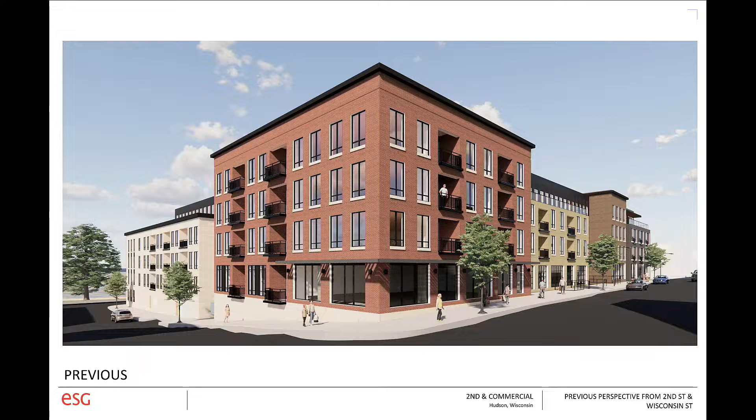The next series of images are before and after. This is the image we first presented to council and to the neighborhood. You can see this view from Second Street shows 4 stories.

The street level is a compressed commercial level. What we've done is remove a portion of that second story, so now the building is 3 stories, about half a story lower. This also gives more head height to the commercial spaces and lobby space, making them much more functional, and the proportions are much more in keeping with turn-of-the-century commercial buildings up and down Second Street.

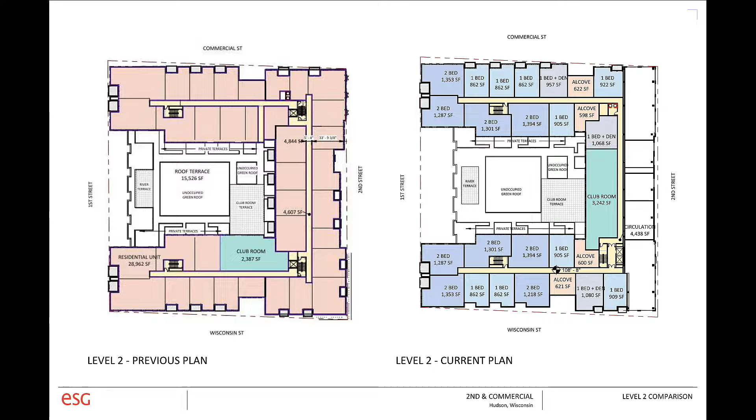The whole goal of the design is to create a cohesive development that accommodates parking without expressing it externally. You could walk all the way around this building and not know there's a parking garage in the middle of it.

These next few images are the current renderings we have. We're still working on these—they look pretty sophisticated and realistic, but they're really still just concept level and schematic.

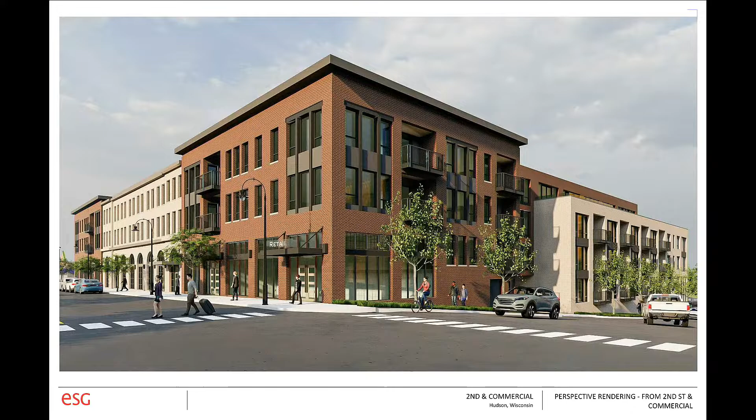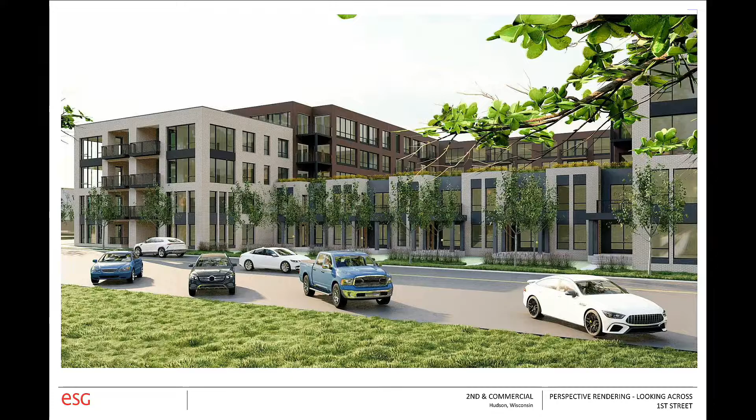These next views are montages where we took a few street view photographs, based on some feedback from the neighborhood, from staff, and also some concerned neighbors.

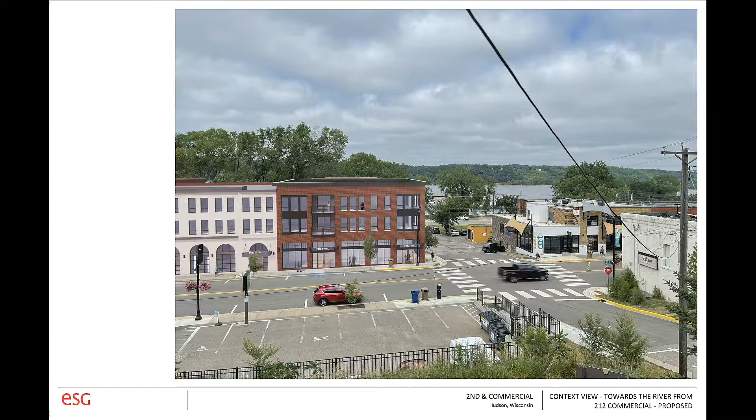Yeah, well, I'm not going to speak for them, but they were somewhat pleasantly surprised at how minimal this was. I did just speak for them, but I shouldn't. Sorry, hold on. But that other vacant lot down there will go someday too, you know that. Sure, that corridor will disappear down here. Yeah, I think it would. The goal is that this area becomes a built-up part of downtown, just like a block north, much like it was earlier in the century.

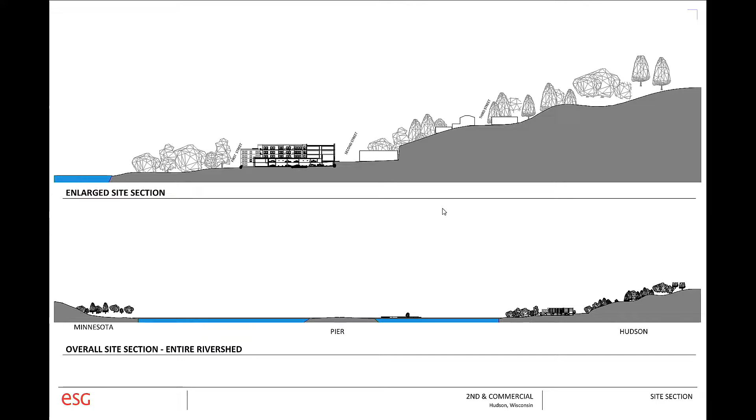This site is based on Hudson zoning code, which is based on DNR measurement of height. This site is within the St. Croix Scenic Riverway, so the DNR has interest here and regulates it with height maximums that the city then adopts. The height limit here is 45 feet, so what we've tried to do is design every elevation to be 45 feet maximum from the street level.

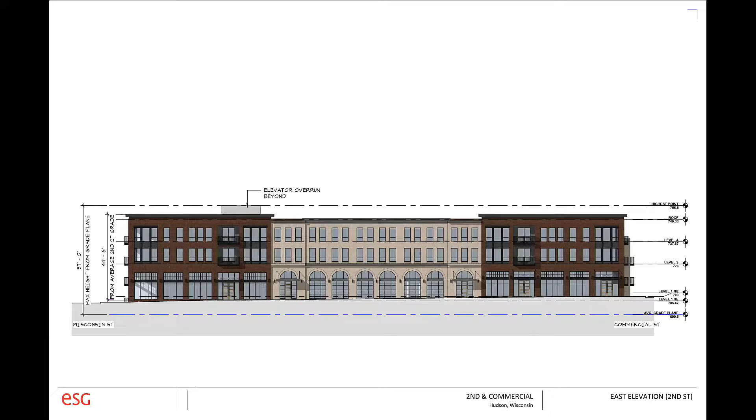This is 2nd Street right now, the elevation from 2nd Street, but as we go around the corner you can see where that grade drops off. The way height is measured is from an average grade plane, and this blue line here is the calculation of that average grade plane.

So it's lower than 2nd Street and higher than 1st Street. And what we're proposing to do is, instead of designing the entire building to be a consistent height within 45 feet of that grade plane, we're proposing to step down the building so that a portion of it is higher than that 45-foot maximum, and a portion is actually a little lower than that 45-foot maximum.

We think it fits into the site a little better for the building to follow that natural topography. And then the variance we're requesting, the way that height is measured is to the absolute top of the uppermost point of the building. In this case, it's the elevator overrun, so it's a very small portion of the building that needs a little extra height for the elevator.

So when you see this max height from grade plane, that 57 feet is from this average grade plane to that highest point of the elevator overrun. The highest point of that building, which is really what you perceive, is about 5 feet less than that. And here you can see where we measure the building from the average grade of 2nd Street to the highest parapet. We're trying to stay under 45 feet.

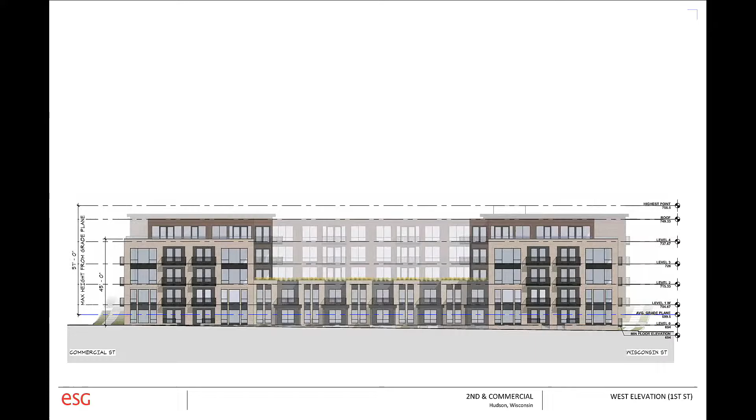And then similar on this elevation on 1st Street, 45-foot height from the street. And here's that view from First Street, looking back up the hill. And here's the Wisconsin Street elevation, very similar to the commercial street elevation. This is where we have the most grade change, where we see almost that full 18 feet of grade change.

Is that elevator only going to be accessible to those units in that part? Because you've got 109 units, obviously not the first floor, but one elevator for all of those units? A pair of elevators, yeah. Well, in the same spot, though? Correct, yep, a pair of elevators next to each other, correct.

So if you live on the far north side or far south side, you're still walking? Correct, yeah, sometimes with buildings that have a large floor plate, you'll distribute elevators in different corners of the building to shorten the walking distance. But when you group the elevators, they actually have a shorter travel time, because when you hit the button, you take the first one that arrives. If they're separated and remote, you're waiting only for one elevator. So the reason we group them is, yes, it takes longer to walk from your unit to the elevator, but your actual travel time from your unit to the lobby is shorter.

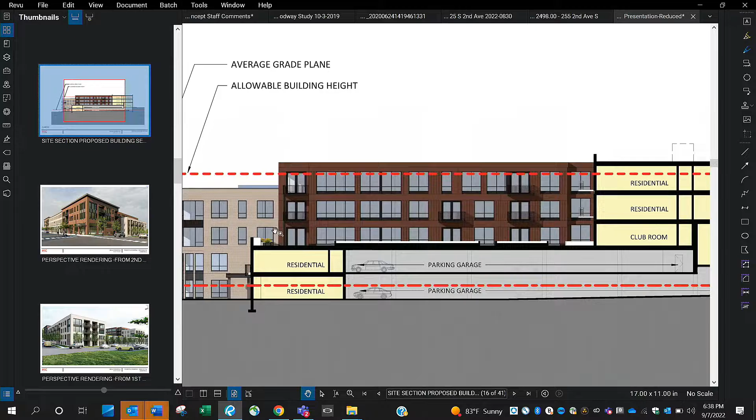Bear with me here. Whoops, went too far. So here, for example, I'll zoom in a little bit. Pretty much every building along First Street has to deal with this, and they have to raise their building up to be 2 feet above that elevation. So the 100-year flood elevation is roughly right here at First Street. There's a portion of First Street that's a little bit lower than that 100-year flood elevation. So what we do is we raise the building up a minimum 2 feet above that.

Is there any data available on how many times we've exceeded that in the past X number of years? 1965, I recall, that was the last time. Really? That's where all those standards came from, was that bad flood of '65. Yeah, the FEMA standards require, in order to avoid buying flood insurance, you to build 1 foot above the 100-year flood line. Wisconsin requires you to build 2 feet above, so they have a little extra foot for some reason.

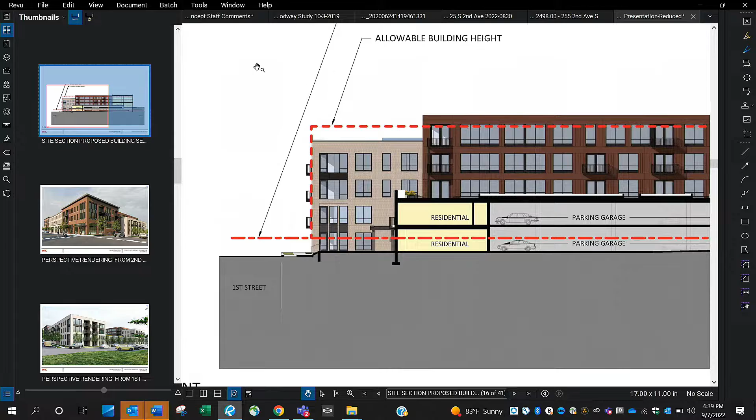Can I ask you a question about your building height and what you're talking about as the average grade elevation? Sure. Back to that last slide you had up before you flipped all the way back here. Sure thing, please. Yeah, okay, and then the one showing the slope of the...

Yep, there we go, I think that one. This is a good one, yep. Yeah, that one.

By looking at your average grade plane, it looks like the high point of your building, which is the center part of it after the front block, appears okay. But at this average grade, it would appear to me that this part of the building should stop right about here—about 1, 2, 3, 4, 5, 6, 7 windows in.

If I'm just looking at your own drawing here, that would be my conclusion. Well, to be perfectly honest, this whole portion of the building exceeds the maximum height. Yeah, since we're asking questions, I'm on it with you. And I know I wasn't here when this concept was starting.

Well, it was the city council, not us. Right. I'm just kind of disturbed by the fact that that's going to be that high.

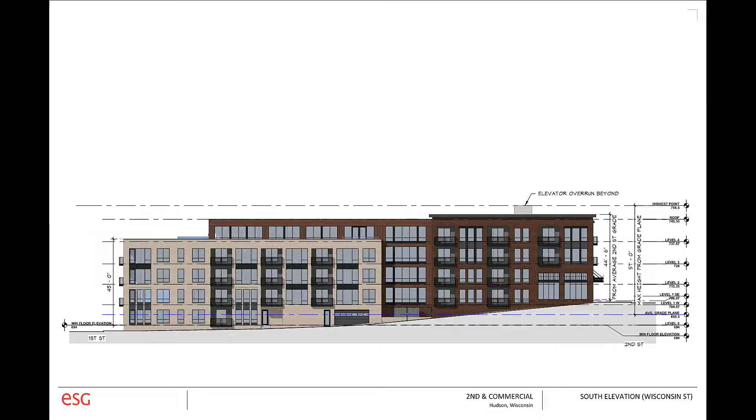I feel like this has been happening downtown—residents, people have been purchasing buildings, and then bigger buildings go in front of them. It's frustrating to see people spending money on properties and then bigger buildings going up in front of them. I think it hurts property values, especially for the houses on the hill if their views are blocked.

I didn't think that was minimal at all. I thought that was pretty excessive, especially when we know another building will be going there eventually next to it.

I also have a problem, and I had the same problem with the other building that's going up. I don't understand how with 109 units there's only 137 parking spots. I understand we have an equation, I get it, but I didn't get to that yet.

Here's the thing—I'm still floored by the idea that we think we're only going to have one car per unit. No, it's not going to happen. So where do all those overflow cars go?

I don't know, because as we've been saying for the last 20 years since I've been here, we have a parking problem, which I don't agree with completely. I've always said we have a walking problem, but with all these buildings coming in, we're going to have a major parking problem no matter how many parking lots we put in.

There's no way—I will eat my left shoe if we only have one car per unit for all of these buildings going up. And it's not just yours. Maybe residential parking standards have to apply here and not downtown, because this is a residential unit, not a commercial part of the building.

So it has to be classified like the ones, like the Massey up on the hill across from the dog track, where they have underground parking too, but also 80 surface parking spots for overflow—friends, guests, relatives, and all that. And I have the same concern.

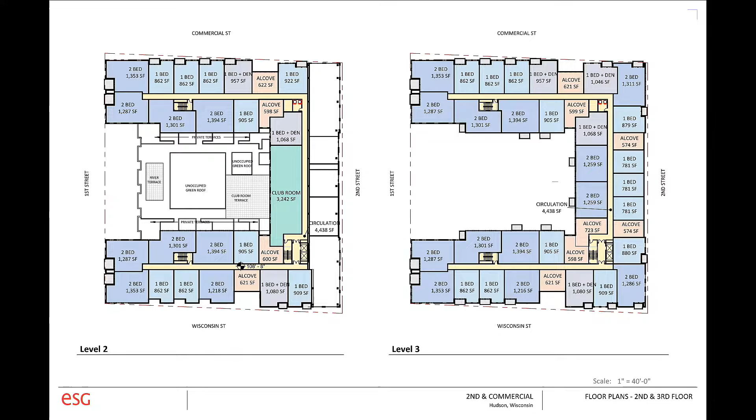All of that area, the lighter shaded part in the center of the building, is all accessible outdoor space for the building. The programmed part runs around the perimeter, and we haven't really scratched the surface on exactly how this area is going to be laid out and where all the features will be, but the intent is that this is the outdoor green space—it's just elevated off the street level.

Thank you for the clarification, but I still think you're short. I'd like to see the study you mentioned. Also, when you talk about this being an urban area, I think what I'm reading into this is that you're anticipating occupants, a fair amount of them, possibly walking to work, since you mentioned we don't have a public transit system here. In addition, we also don't have a vast amount of employment downtown, and I'm curious how many people who work downtown would also be interested in living in a rental situation.

And with that, I'm also curious what the market rents are for all the units, and how that's segmented out. We're just over $2 per square foot.

And the way to make that equate to real money is just take the square footage of a unit and multiply it by 2. That's the average across the building. So a one-bedroom unit is going to be around $1,700? Some of them are more, some are less—$1,700 is typical for a one-bedroom market unit.

There are smaller units in the $1,300 to $1,500 a month range. Our largest townhomes on First Street will be significantly more expensive than that. So we create a diversity of price points throughout the building so that we can have a diversity of people at all different stages of their lives—bigger units, smaller units—and that is what influences our parking.

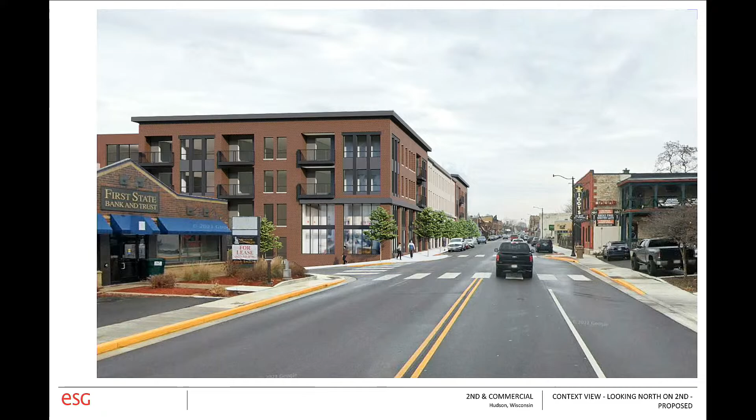I don't see the link to the existing architecture of downtown. I see it as a fairly contemporary building. I personally would like to see it blend in more. I think it sticks out significantly compared to the rest of downtown, where other buildings have attempted to blend in. I'm not against contemporary, I have no problem with that. I just think the other buildings downtown have tried to retain the character of the period they were built.

It's an interesting comment, Commissioner, because we heard that from the first concept we shared. And we spent a lot of time trying to improve the architecture to satisfy that point, to make it feel more consistent with the historical architecture of downtown Hudson. So one of the things we're really excited about is this central element, a 3-story building with arches that go along the middle of the building. There's a series of boutiques on 2nd Street that, if you just took the middle portion of the building, the white portion, it's pretty much exactly the same building.

I don't know what that building's name is, there's 6 or 7 tenants in it. But I'd encourage you, if you go to 2nd Street and look at that, then look at this, you'd say that actually looks strikingly similar to that building where Kensington is. The 3-story, all masonry with a window pattern that we think is pretty representative of downtown, with this nice thick metal cornice on top, were all influences we drew from spending time here trying to build a building that fit in.

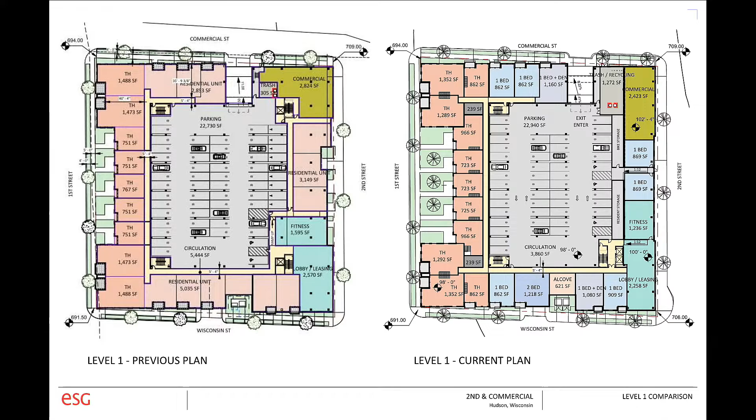You can see the retail on the left side, the 2,824 square feet on the corner, and then the 2,423 square feet on the corner on the right side. So the rendering on page 1 that says retail all the way down is wrong on those pictures? You gotta look at the inside diagrams. Yeah, maybe it's aspirational.

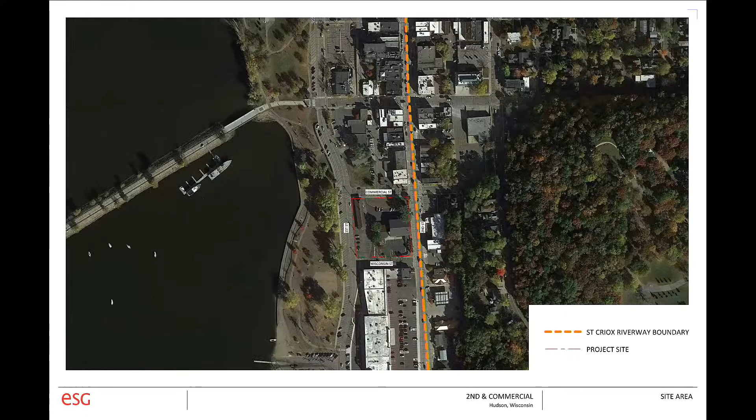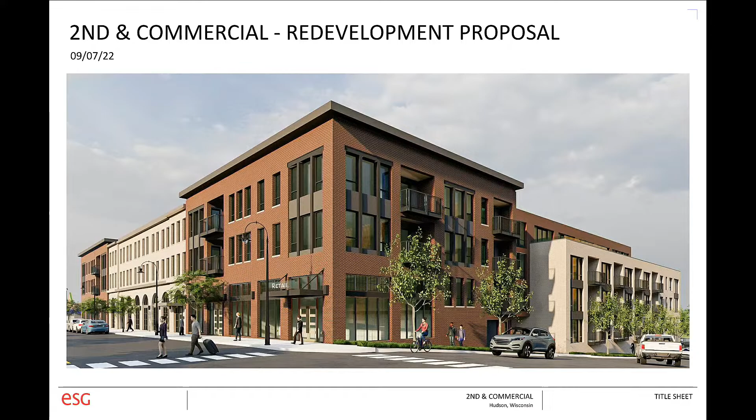I'm looking at page 1, it says retail. Just that corner? Second and Commercial Street. We have other uses we'd call active uses that go up and down Second Street, including the building's front entrance, the fitness center, multiple residential units, and then the retail space that starts to hit the corner.

And we're looking at some configurations that could add an additional 600 or so square feet of retail space down onto commercial as the corner wraps, that we're still playing with. And the 2 residential units that face Second Street are designed such that they could be converted. As we move the project forward and Ari and his team reach out to potential commercial tenants, if they find more tenants than can fit in that 2,400 square feet space, we have the ability to expand it.

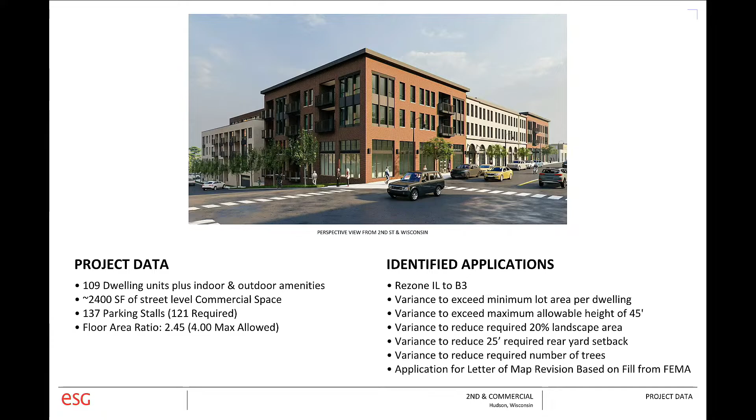You can see, if you're interested Councilmember, on the first level, the image on the right—it's kind of hard to see zoomed out, but there's doors that go into all these townhomes. All these units have direct access to the garage. They don't have to go through the lobby or the elevators, and doors onto the street as well.

Okay, for all their cars? No, those are designed to be for the two parking spaces that the townhomes will get each.

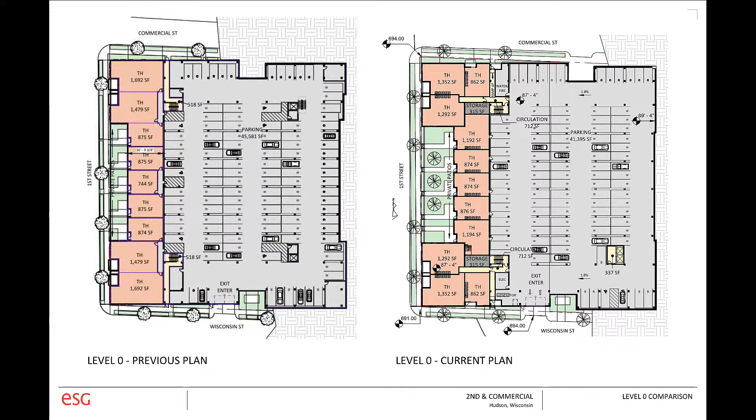What is our goal here tonight? What are we here to do? Discussion and possible action is the way it reads, but what are we looking at? Sounds like they want some data on the parking. So is postponing an option? Yeah, I think we just meet again. Let's get the information to the council members that is relevant to the discussion.

Well, I think the parking—just so we have a better direction of what's going on. I mean it's not intended to penalize you guys, but maybe we don't know ourselves exactly what to expect here, or we've only seen the side effects of what's happening down there, and as it gets busier it's great for everybody, but it also causes a problem.

I still beg to differ with you on that when you say you only need one spot per unit, because I have apartment buildings by me, and half of them have at least 2 cars, working couples. I'm not trying to throw that as the fish hook that stops the boat here, but we have roughly a third of our units that'll have 2 parking spaces.

For double? Okay, well you thought about it then. We have, it's a big investment. So to the mayor's point from earlier, we've got to get it right or we won't be able to rent units. So we have a very large incentive to make sure that we get the parking right.